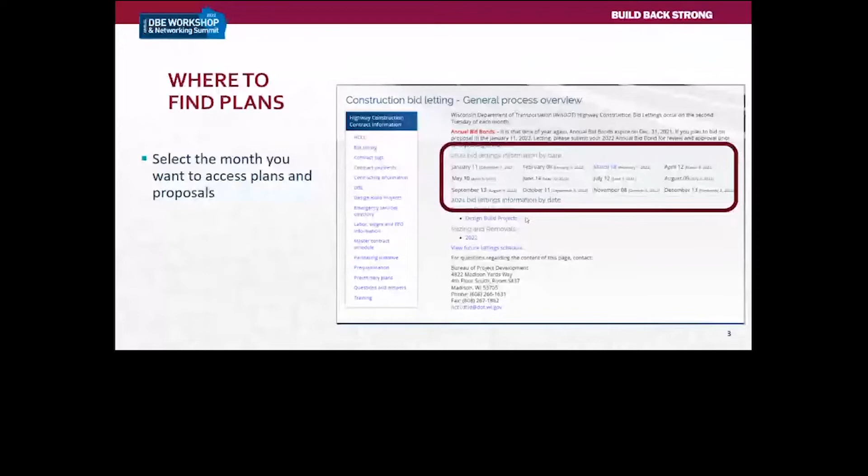2022 year general process overview, and it'll give you the letting schedule by date. As you can see, we have January through December listed here. We're in the third month, which is March, so you can see January, February, and March, but we have to wait till we get into the let month to see the plans. So when you click on March 8th, which is the bid letting that's coming up next week, you can access the plans and the proposal for any one of the proposal numbers, or call numbers. It starts at 1, and I think there's possibly 44, 45 on this letting for March. So you simply click on the plan and the proposal, and then save it to your desktop or your C drive, whatever you have for storing those materials.

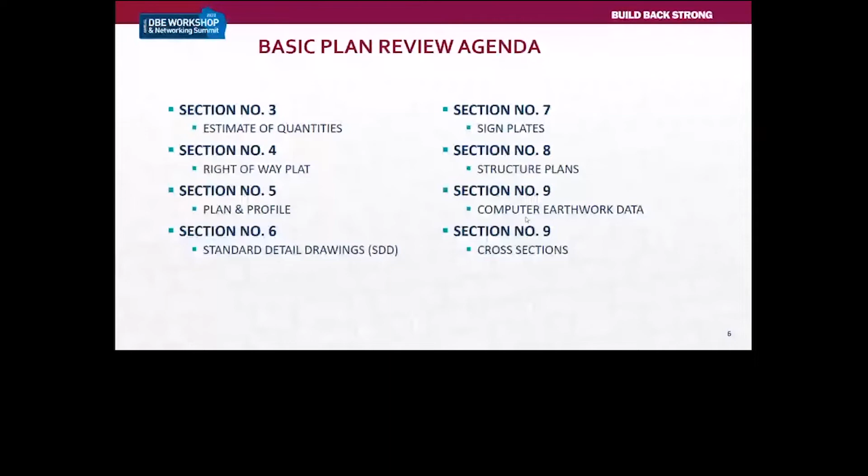Section 5 is your plan and profile. Section 6 is standard detailed drawings, or your SDDs. Section 7 is sign plates. Section 8 is structure plans. Section 9 is computer earthwork data, as well as cross sections. Now, we chose this particular plan to review to give you an idea, because this one has it all, 1 through 9. In some cases, you will only have a couple of sections that are pertinent to your specific project.

Other stuff that we're going to review and touch on today is other contract documents. We're going to briefly talk about the special provisions, the standard specifications, addendums, and the hierarchy of contract documents. And with that, I'm going to turn it over to Don.

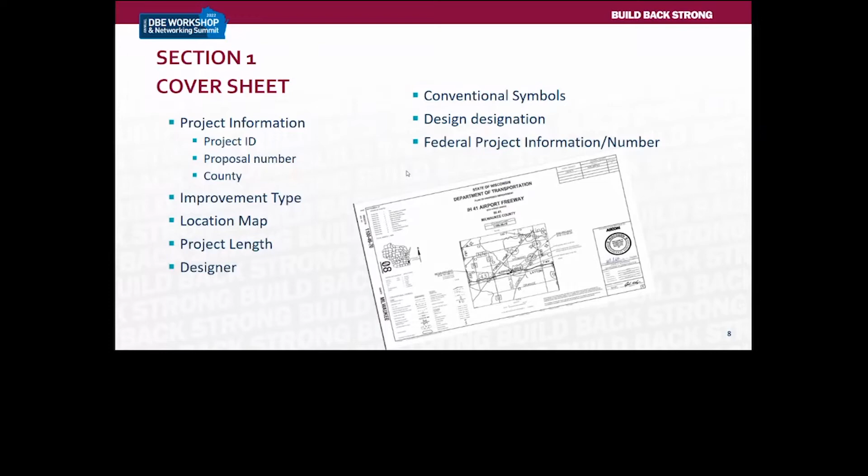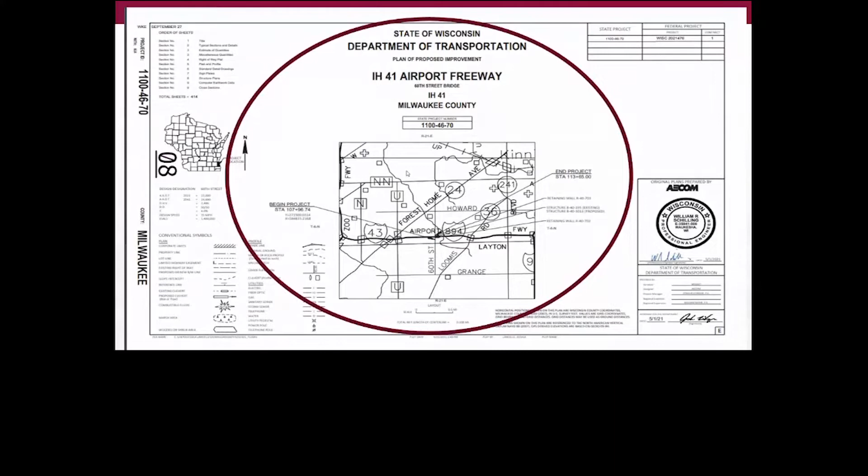Okay, here you can see the cover sheet of the project that we're going to walk through today. It's the Interstate Highway 41 Airport Freeway project. As Benji said, I think it has all the different types of sheets that are available in the log of sheets. So we'll be able to walk through this particular plan and show you all the different types of sheets within it. 1100-46-70, as you can see, is the project ID on here. And as I mentioned in the last slide, all those different things are on there.

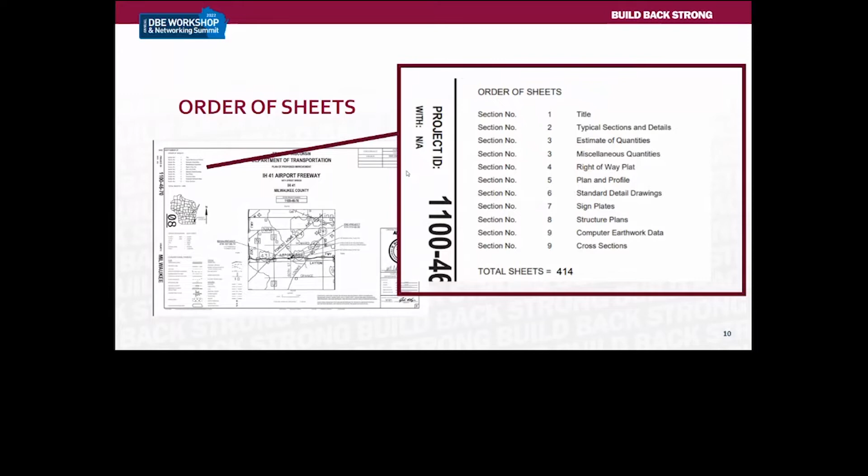So the next thing you'll notice on the upper left-hand corner of that cover sheet is the order of sheets. Very important. You can go to that right away. You don't have to open up and try to leaf through the plan. You can go there and see where the different parts are. That'll give you at least initially what part of the plan you're looking for. As an example, if you're looking for cross sections, you're going to go all the way to the end, section 9 at the very bottom there. So next slide.

So the general notes portion is probably one of the most important parts of section 2. That's where you're going to have a lot of information relating to generally what is required on that particular plan. It's very critical to review this before you're bidding and during the project, so you understand that you covered everything in your bid, and also during the project you cover everything that's required, because if you haven't, you could find yourself in a bit of trouble, either not bidding enough or not being complete as far as the engineers indicate when you're done with that particular item.

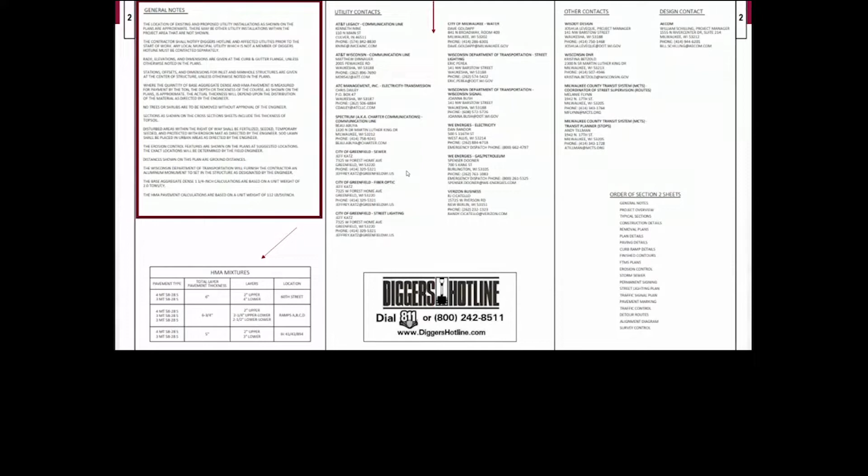You'll also see some other charts here. HMA mixtures is shown here. In the middle, you've got utility contacts. Very important that you understand where that is. Digger's hotline down below. Then you've got other contacts, including the design contact for the plan.

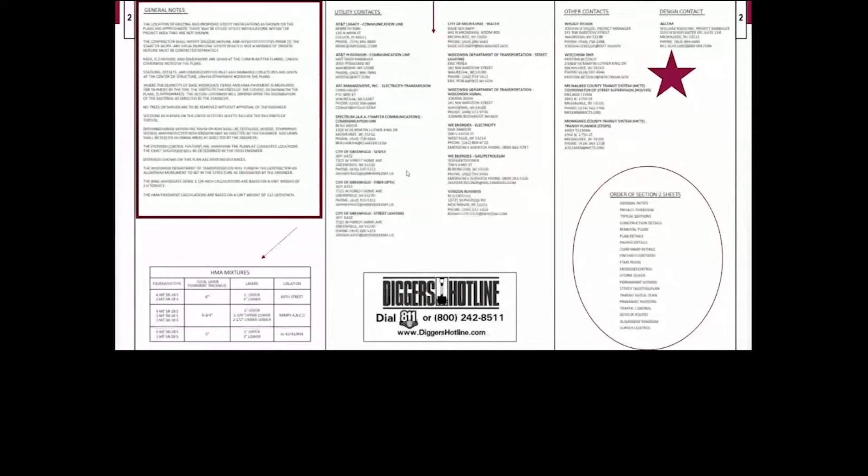And then there's a repeat of the order of section 2 sheets right there. So again, if you're looking for a certain sheet, it's very easy to look at that and say, well, it's about halfway through. So you don't have to go through all the different sheets in order to find what you're looking for.

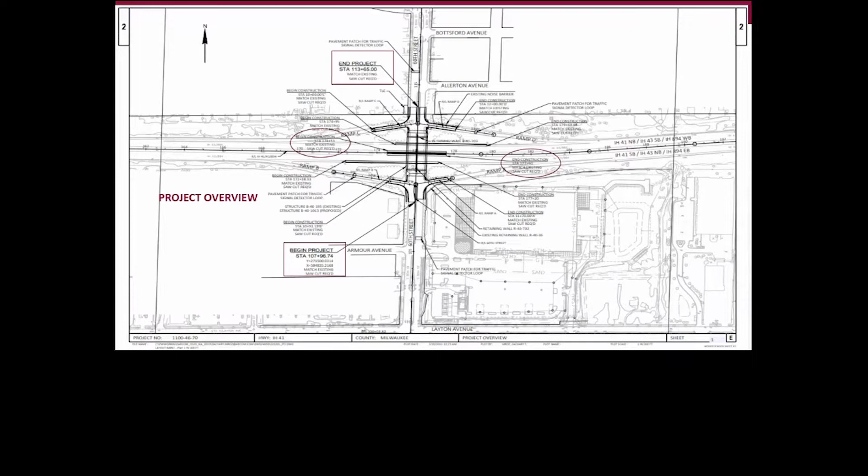Hey, Don, this is Steph. There's one question in the chat. If I'm focusing on clearing and grubbing, what section am I looking for? If you want to put some emphasis as you explain the plan on that, please. Okay, that's a good question. Typically, there may be a detail on the plan that shows that, and as we go through, we'll watch for that and point that out as we look at some of the sheets in the plan.

Also, when Benji's going to talk a little bit about miscellaneous quantities, it will tell you clearing and grubbing quantities, and also will show you the stationing and offsets for those items. That will then give you the information you need to go back to the plan sheets to see where those actually are. So we'll try to remember that and show you where you can find the clearing and grubbing. Good question, Marcus. Thank you.

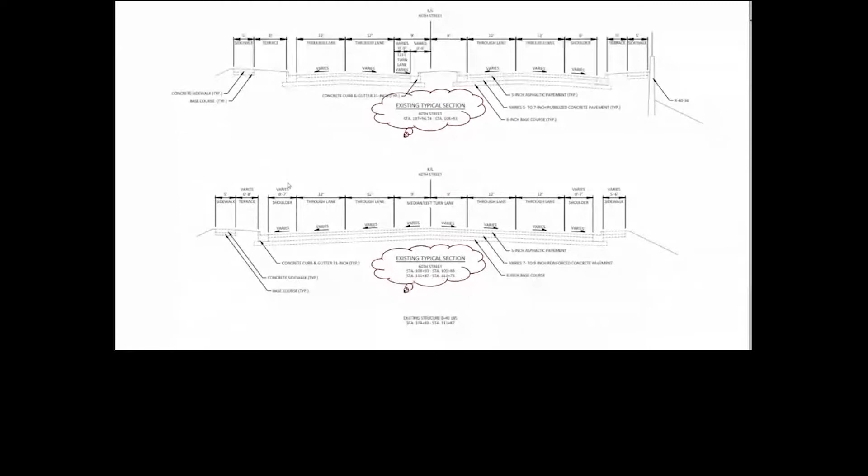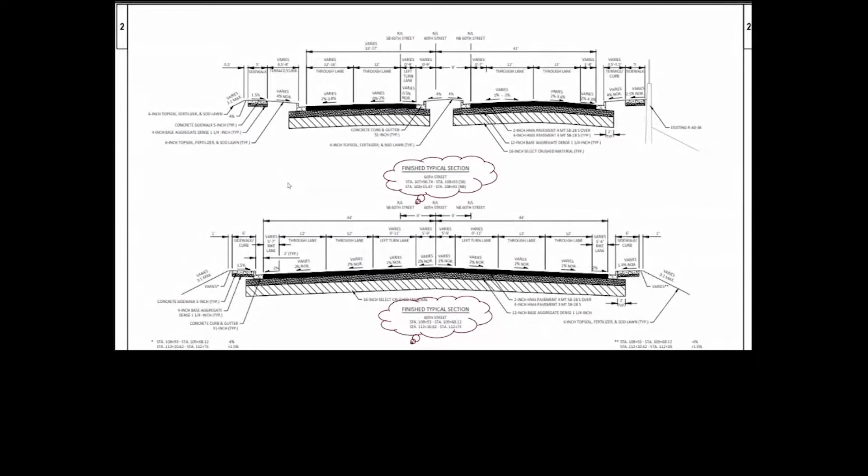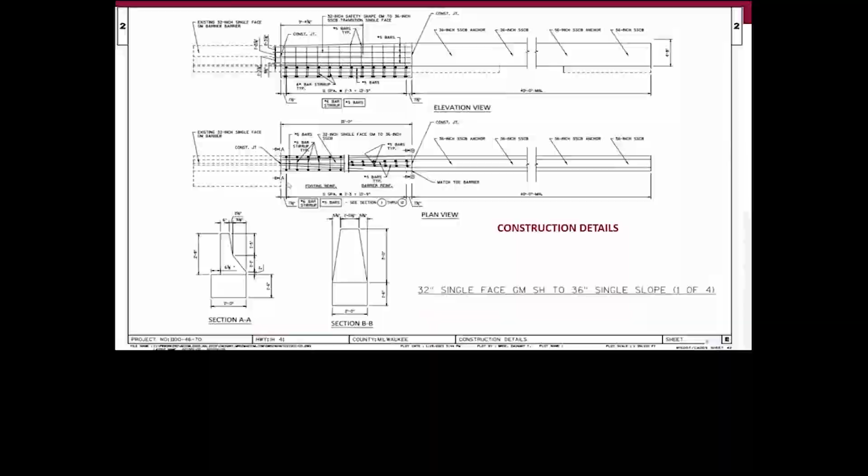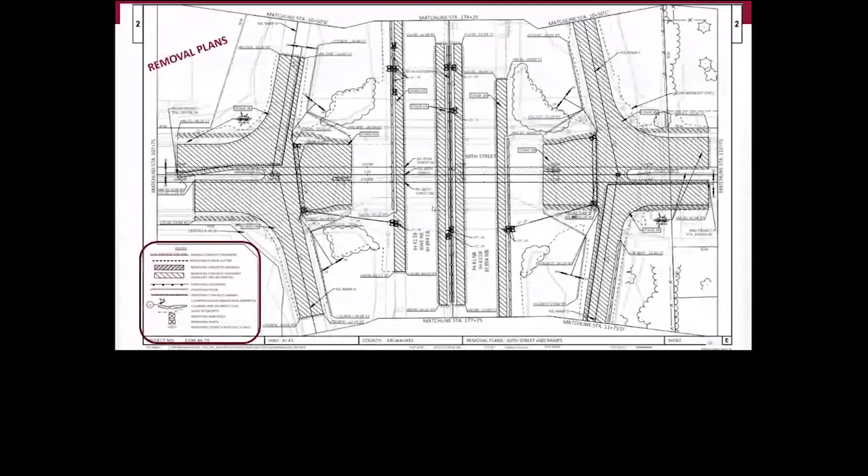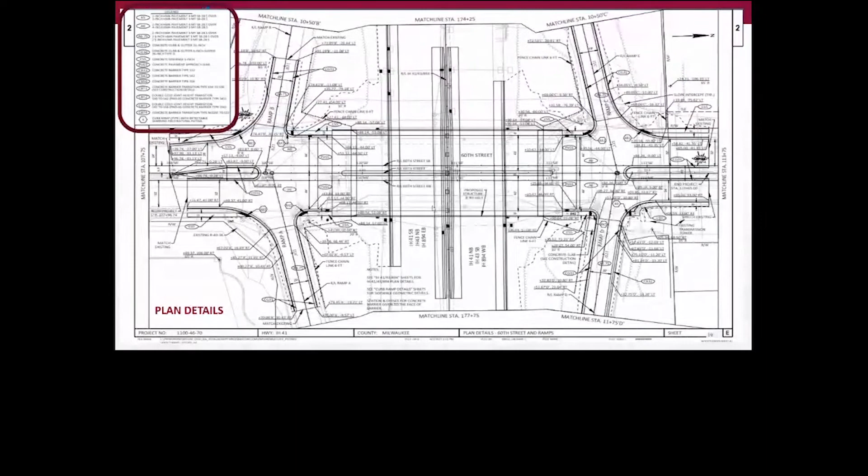Okay, this is a plan detail, which gives you kind of a look from above down onto the project and the improvement you're going to be working on. In the upper left, there's a legend, which has a lot of different item numbers and things in the circle there that pertain to items on the particular plan sheet here. Again, this is looking down, showing you limits of pavements, bridge limits, those types of things. A lot of this information is used for laying out the project when the survey lays it out, as well as you building it to understand what items go into that particular improvement.

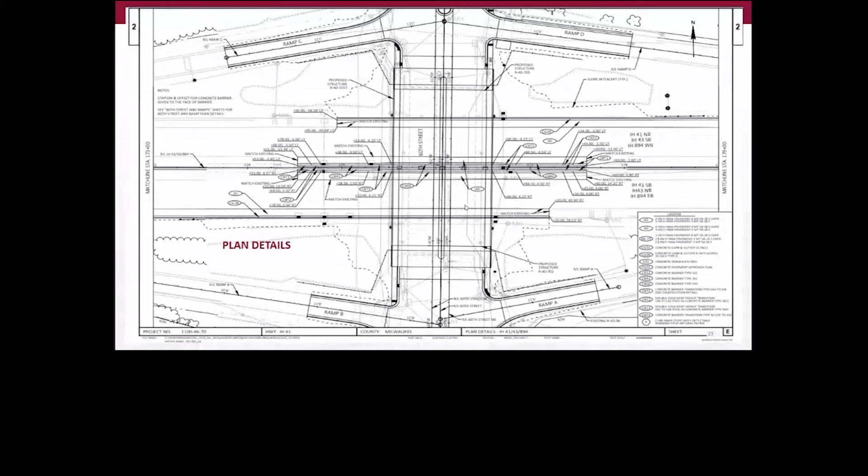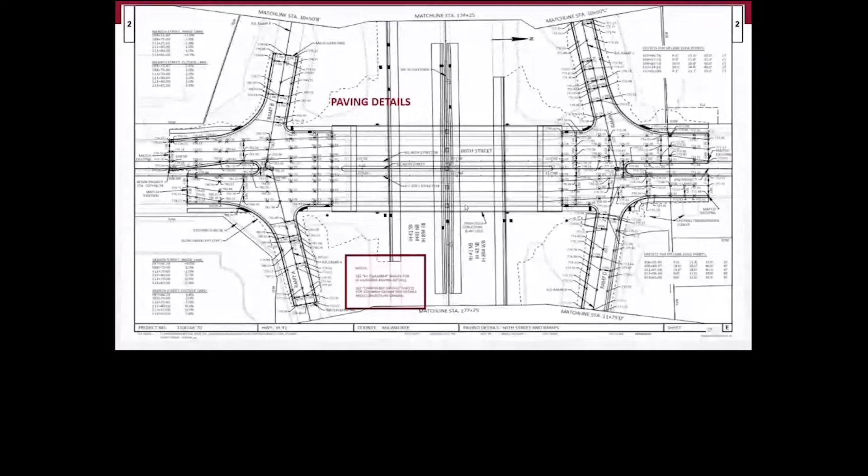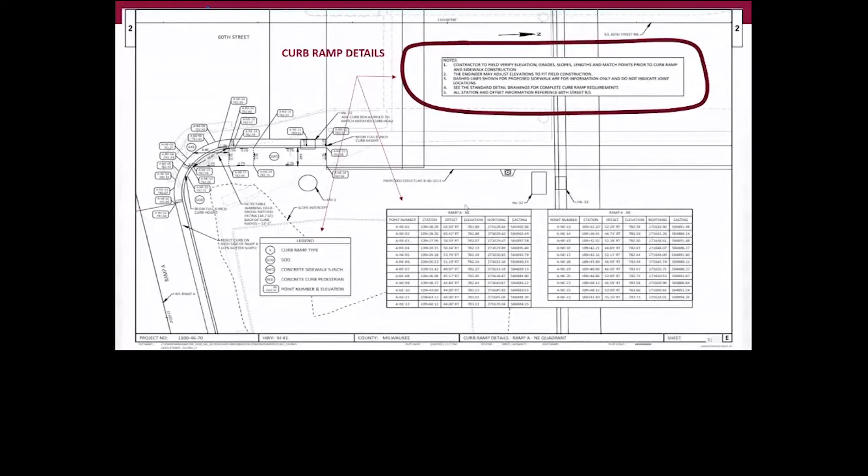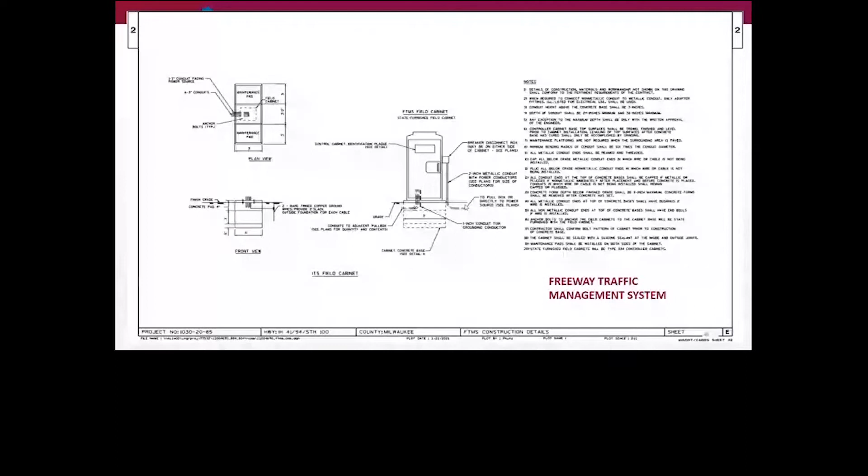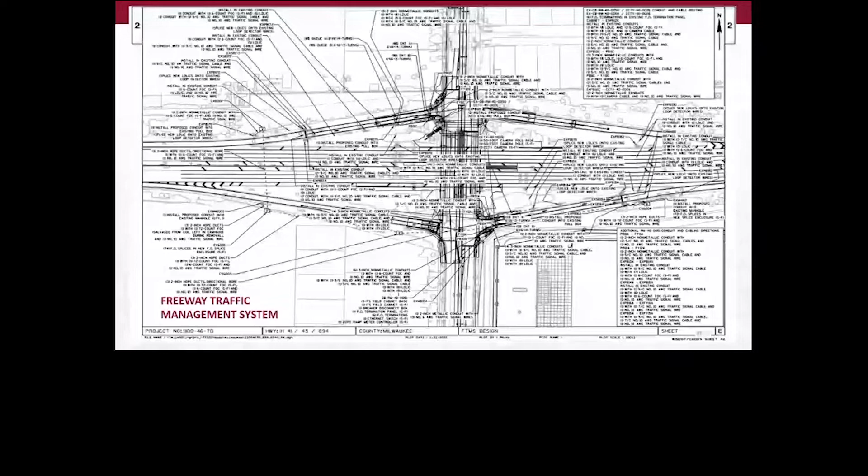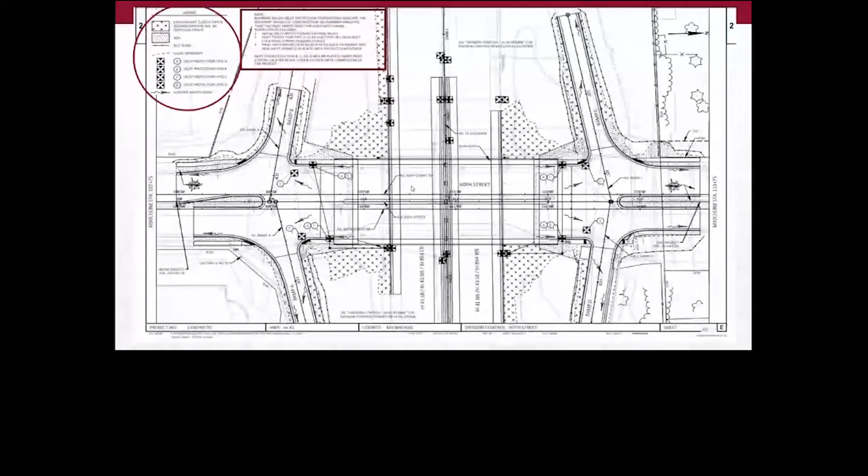So this is the kind of sheet that if you're an erosion control subcontractor, you'd be looking at to try to understand where things are being placed in relation to different things on the project. A lot of these will be repeated in the actual quantities and the miscellaneous quantity sheet, but these are the actual sheets that show you how to put them in, the notes relating to that, and all the different items on the erosion control plan.

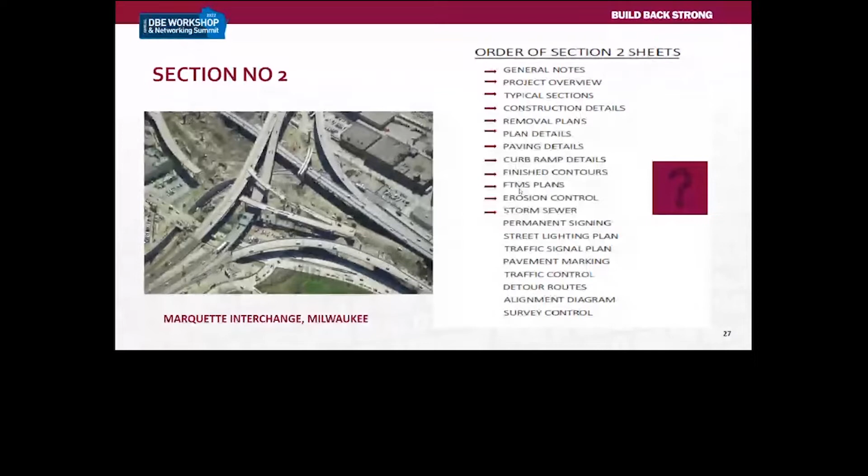So I am going to move on to a couple more sections in section number 2, and we're going to start out with permanent signing. These are pretty typical plans as far as the types of signs, the required signs that go on freeways. They're pretty uniform, and it's not up for interpretation. Basically, you're told exactly what's supposed to go there. So you have a series of permanent signing plans, and you're looking at it.

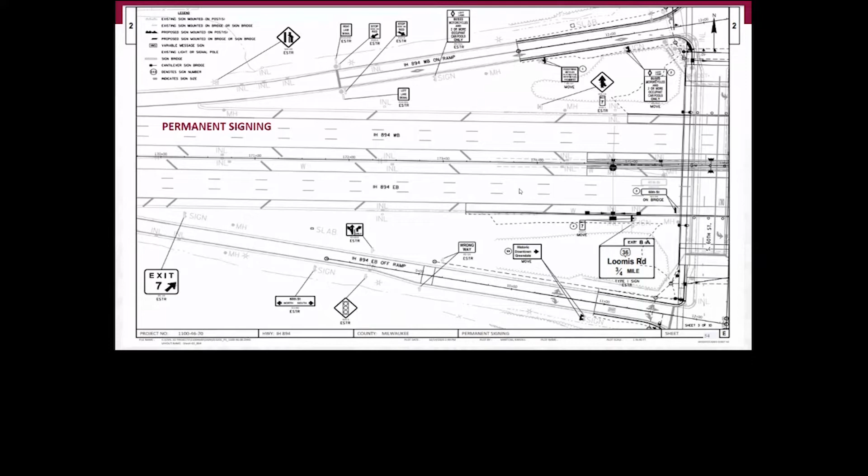So you always want to make sure, especially if there's staging, that you are working with the other contractors to make sure you don't put your permanent signing in and they still have earthwork to do or something along those lines. You have to learn how to coordinate certain aspects of the project.

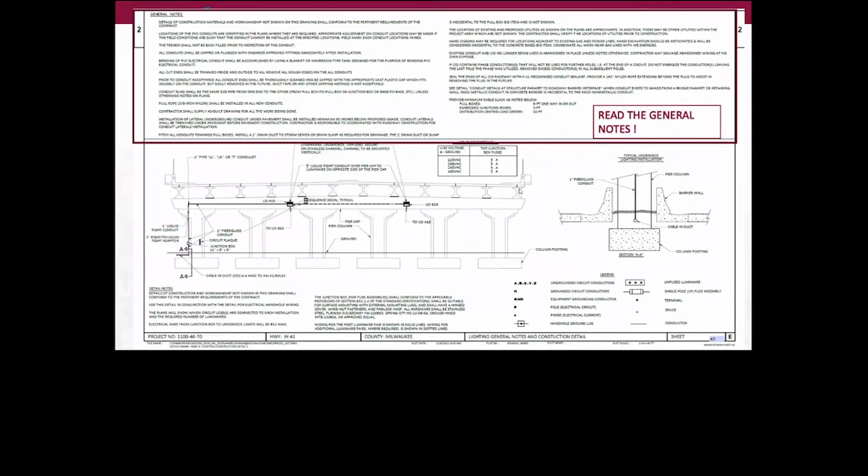So make sure you read the notes anywhere on the page. Super important, because that's where people get hung up when there's an issue. They just didn't read it or read it correctly.

So, Benji, we have a question that's come up on station numbers, asking if the station numbers are organized in a standard way. For example, do all odd numbers run north-south or east? Start on the south side of the project limits and sequentially increase as it moves north. Does that make sense? Yeah, I'll start this out. Don, you can jump in. Excuse me. Okay, yeah, I can jump into this one.

Typically, stationing runs from south to north. So if you're looking at a plan where the roadway runs from south to north, you'll probably see stationing more like a 1 and maybe goes to a 10, 1+00 goes to 10+00 as you're moving to the north. And when you're going east to west, it typically would start from a lower number on the left side or the west side and then go towards the east. Now, that isn't always the case, but that's typically what is done.

Because a lot of times you may have configurations with interchanges and ramps and all kinds of things that go all different directions. So the stationing may not always follow what I just said there, but in general, they basically do what I talk about. They typically run south to north and west to east, but not always. So you'll have to be careful.

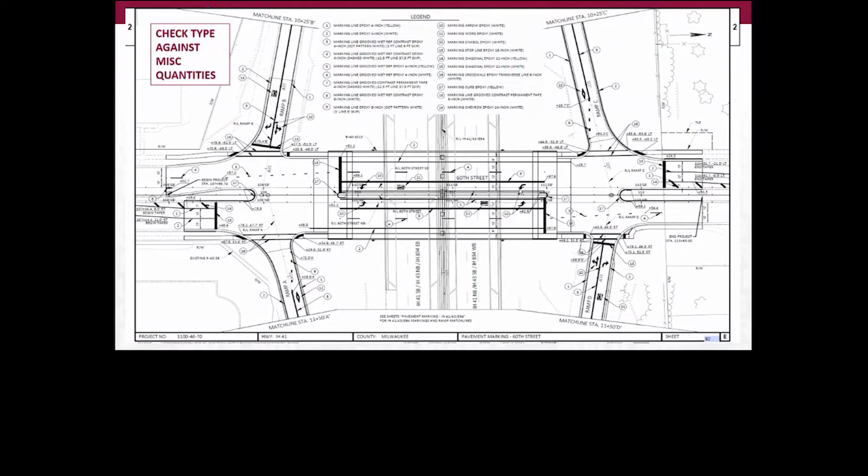So there's times when things get changed that don't necessarily make it into the final plan, depending on what the time frame is. So always check those. That's just good practice to check what you see against the miscellaneous quantities.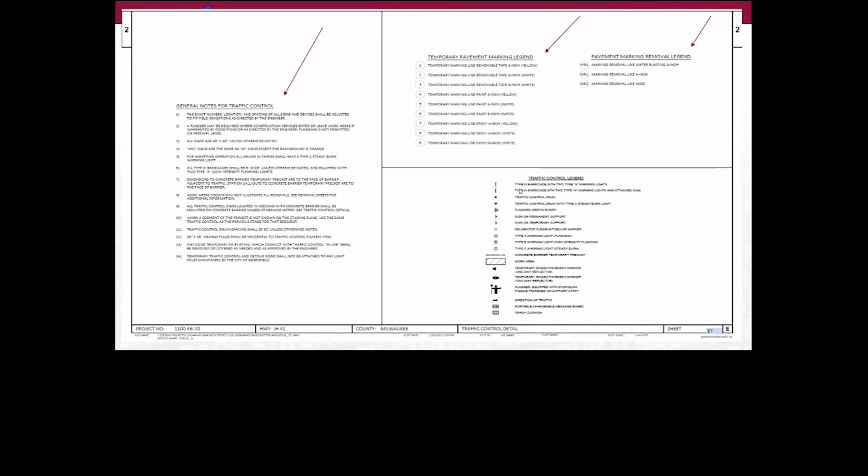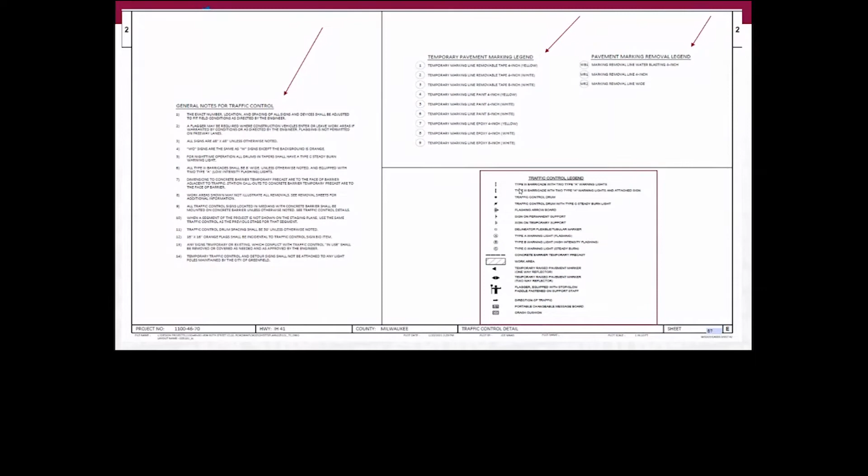Same thing with temporary pavement marking legends. Tells you what you're supposed to do, where you're supposed to put it, and sizing, color, the whole bit. Same with the pavement marking removal legend. Gives you the little bubbles and tells you where you're supposed to remove these lines. And again, these are things you want to compare to the miscellaneous quantities. And of course, we have our traffic control legend, which gives you all the different symbols that you'll see on the plans themselves.

As an example, this is a traffic control detail for a 3-lane full freeway closure. It gives you where the signage goes, gives you the traffic control notes, and again, read the notes. And it gives you the basic layout in conjunction with the MUTCD.

This is the layout. It's not in stone. There are certain things that might tweak this just a little bit. Before you do any tweaking, though, you have to have it discussed. But this is your best basic typical layout for a 3 full-lane freeway closure.

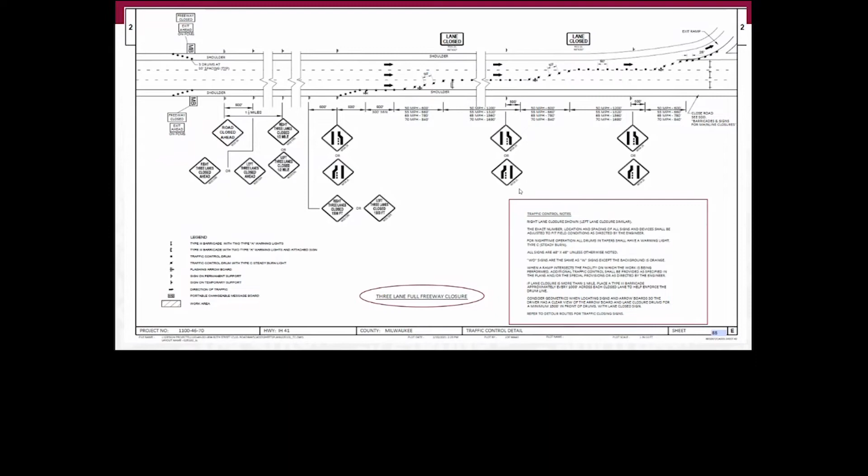I showed this because a lot of the projects have detours. I mean, how many times have we gone down the road and we see the detour signs? It's amazing. You might see, depending on where you are on the road, a couple of banks of signs. But a detour route, especially for a project like this, has got so many signs. So while you're doing this, you have to read the notes about covering it up.

How is it getting paid? Is it incorporated into the detour route bid item? Is it paid separately? There's all these different things. So you have to make sure that you're reading all the notes and you understand how the items are paid.

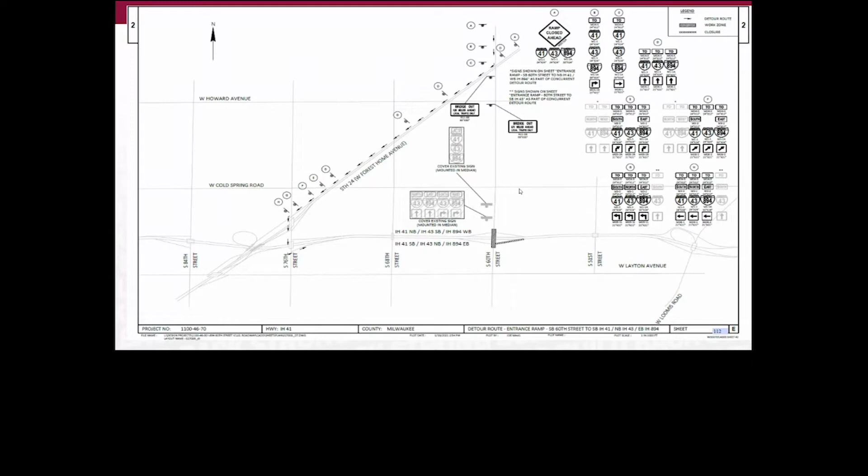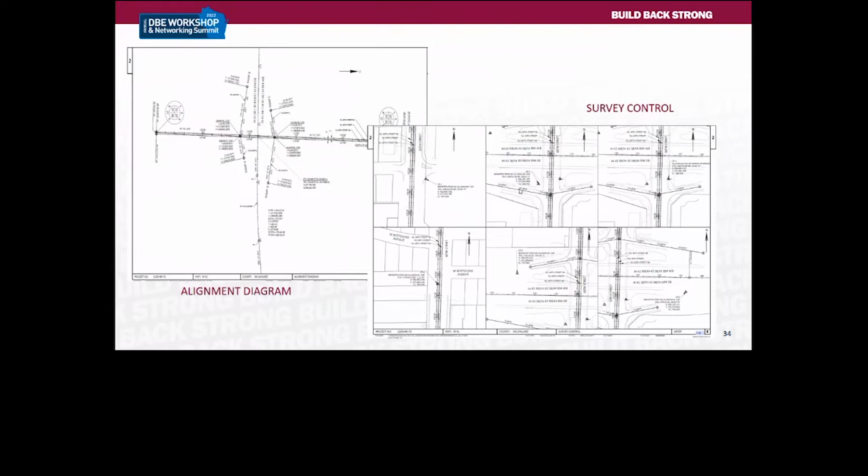The other thing we have is the alignment diagram, as well as the survey control. The designer gave you all these different benchmarks and control points in this. So when you're doing your GPS for survey, you know, when you're benching to do your survey layout and everything else, they provided that for you. And there's also a section in the special provisions on this particular job that does talk about that.

So section 3, estimated quantities and miscellaneous quantities.

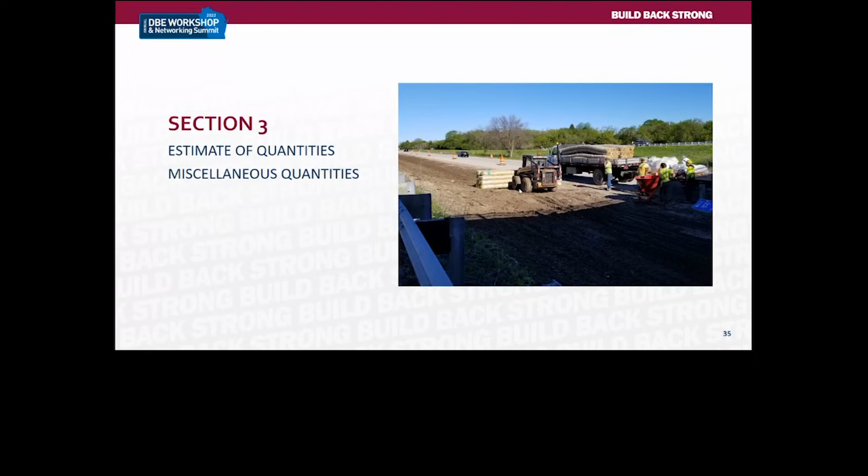Some people might say, well, isn't that the same thing? Well, actually, no, it's not. The estimate of quantities is a sheet at the beginning, right before the actual breakout and breakdown of the miscellaneous quantities. It'll give you the prop line, which is the sequential ascending order. It starts at 002 and there's no finite number of items you can have on a project, but it does increase by 2.

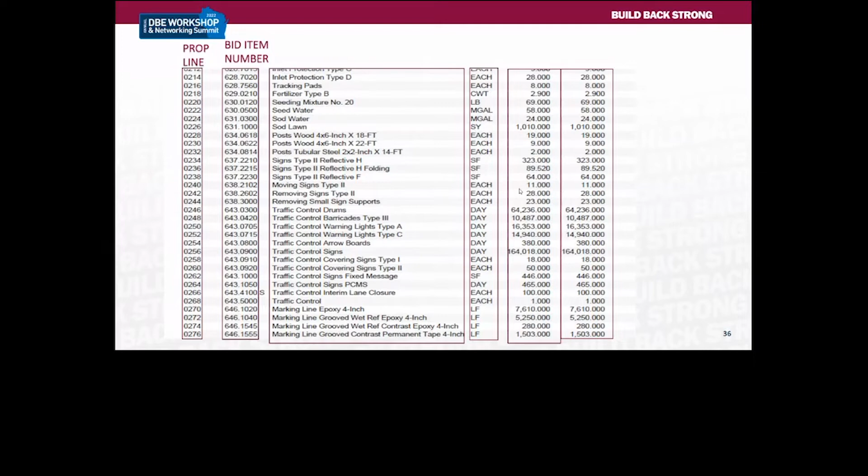Then you have the actual bid item itself. You have a description of what that bid item is. It tells you what unit of payment it comes under, whether it's each, cubic weight, a pound, square foot, day, linear foot, square yard, cubic yard. It'll tell you right here. This is your total that they show for this particular project, and this is your quantity.

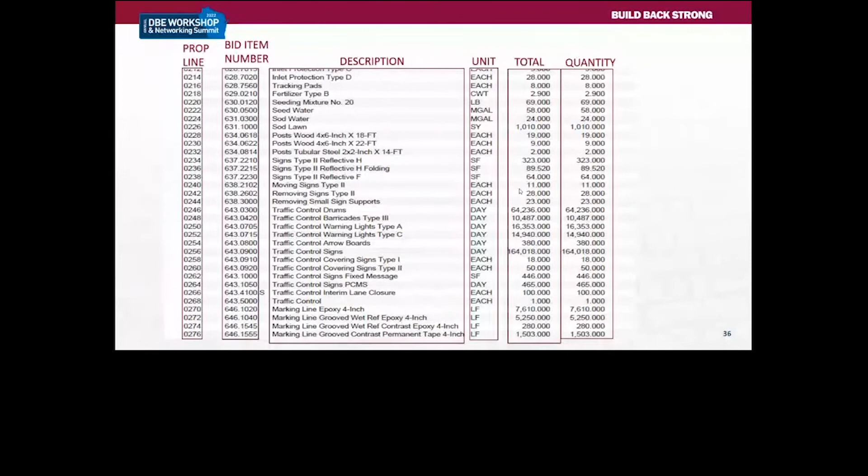Now they have a total and a quantity because sometimes a project will have 2 different project IDs, but the quantities under the bid item will cover the 2 project IDs. So they'll have one estimated quantities for one project ID, then another one for the other project ID, but they will have a total quantity if they have like bid item numbers. It's a little confusing. This one thankfully only had one project ID, but if you do get into projects with multiple project IDs, make sure you're looking at all the sheets and you know what the actual final quantity is for that bid item.

You'll also find right after the estimate of quantities is the Earthwork Summary. If you're doing earthwork, learn how to read these, make sure you understand. The designer will typically always give you an undistributed amount. It talks mostly about the excavation under bid item 205.0100, but it also gives you the 208.1100 select borrow expanded EBS backfill. So these are your common excavation totals that they're anticipating.

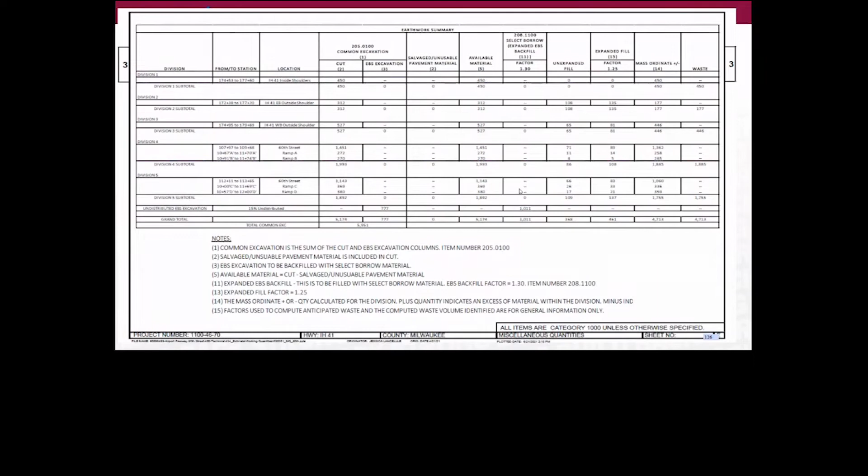Make sure you're reading the notes below because it gives you all sorts of information as far as the sum of cuts and fills. It gives you what your available material is for salvage versus unsuitable material. So these are things you absolutely want to look at if you're going to be participating on these types of bid items.

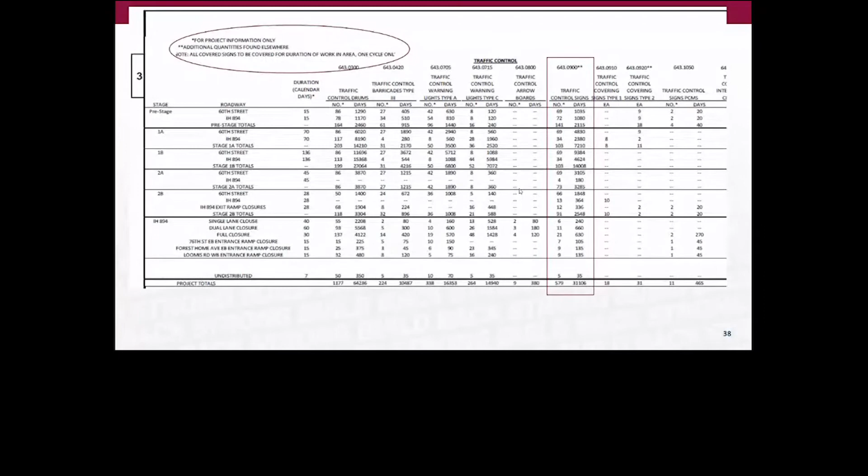Okay, I pulled out the next couple of sheets because a lot of people get trapped and caught up on this. This particular sheet gives you the notes that say one asterisk is for project information only. 2 asterisks is additional quantities found elsewhere. And then it's also telling you that all covered signs to be covered for the duration of the work in area count as 1 cycle only.

So if you cover it up, it only counts as 1 until you take it down. And it's telling you it's supposed to be covered for the duration of the work in the area. So those are not paid by days. Those are paid by 1. It gets put up, stays for however long, gets taken down. That's 1 cycle.

So I want to draw your attention to traffic control signs because you see we have a double asterisk there. And we have a total quantity of 31,106 signs. But I know because it has a double asterisk that there's some quantities elsewhere, so I have to go find those. The easiest way I do it is I search the plan. I just put in Control F, put in the item number that I'm looking for, and then just keep hitting next. So that's what I did when I was putting this together, and it brings me right to it.

So again, it has additional quantities found elsewhere. Well, we already know where 1 is. We know that our quantity is about 164,000 something. And here we have 132,912. And I did do the math. It does match. So we know that this particular item is showing quantities in 2 different locations. So you always want to make sure that you're finding all the quantities and that they're adding up to what the schedule is saying.

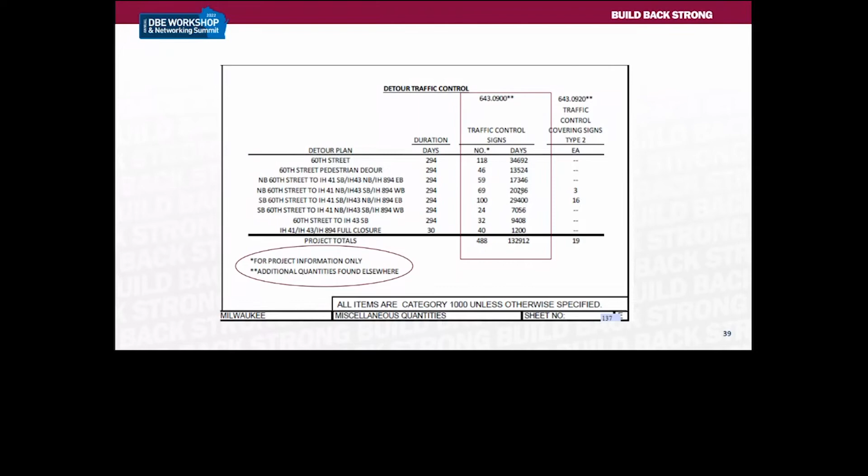All right, we're going to move on to section 4, the Plat. This gives a lot of good information about the monuments. It gives a lot of good detail in the notes as far as right-of-way boundaries. It also gives information on relocation orders for utilities. I could spend about an hour, hour and a half just going over this sheet with you guys, but I will spare you. But remember that this is in here, and just don't flip past it. Don't think, oh, I don't have to read that. Take the time, read it. You'll get some good information from it.

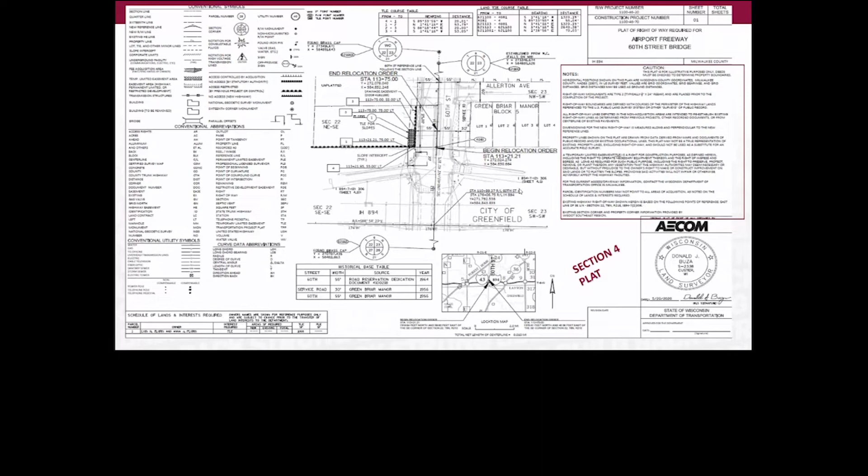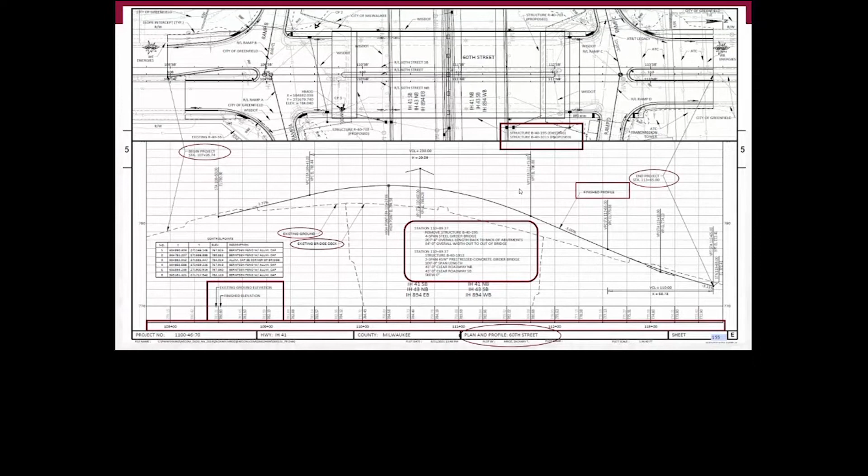So our plan and profile. You see at the top, we have the plan view. You pretend like you're looking down at it, and it gives you an idea. And Don explained this earlier on. So on this particular one, you can see the top is the plan, the bottom is profile. We have a begin project, and we also have an end project on either side of the page. You'll note that we do have a dotted line and a solid line.

The notes are telling you that the dotted line is an existing ground. That's your existing ground right now. It's also telling you right where your existing bridge deck is. So this project is elevating the roadway and the bridge deck, and that is shown as the finished profile, and that's your solid line. There's a lot of good notes on this page.

Down at the bottom lower left, you'll see that you have a shaded gray number, and then you have a darker gray or almost black. That is your elevation. Your light grays are typically, if not always, your existing elevations, and your darker is your finished elevation. The plan and profile isn't totally loaded down with notes and information. The notes and information that are on here are direct and concise and tell you exactly what you need to know based on this particular page.

So here it's telling us that we have an existing structure and we have a new structure, and it's telling you where it goes. It's talking about how you're going to remove the structure and then put a different one in its place, taking a 4-span steel girder bridge and making it a 2-span 45-foot wide pre-stressed concrete girder bridge. So these are all different things, and that'll also help you if you are part of a demo team. At least now you know that you're taking down a steel bridge where you might not have known that had you not read any of the other pages.

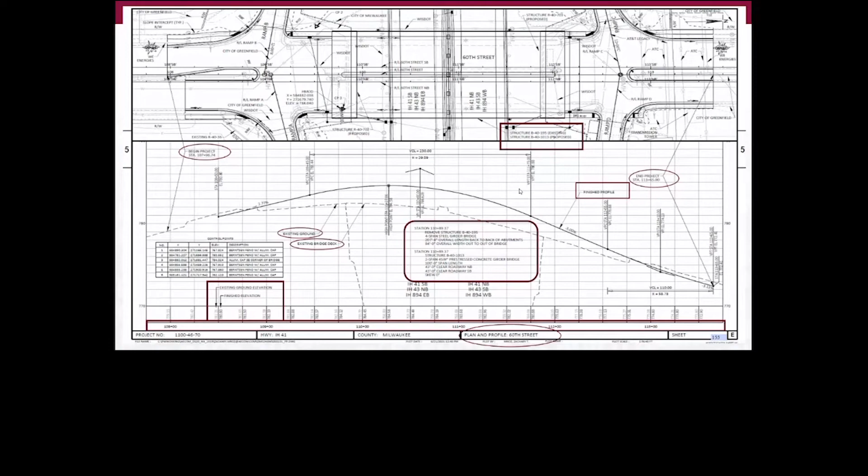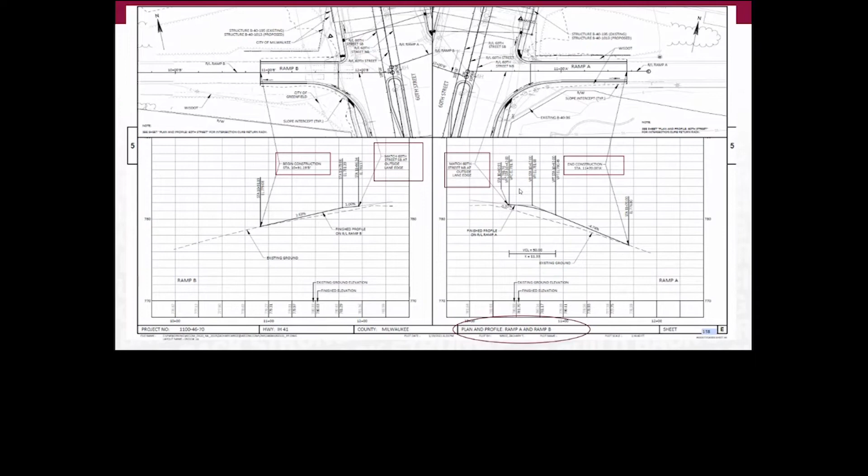Also, they provide plan and profile for ramps and roadways, anything that's within the project footprint. So again, it's the same top view or the plan view, and then you have your profile view, and this is particular to ramp A and B for this project. The same information is also going to be on the sheet as far as elevation, existing and finished profiles, and your start and stop positions.

So what the designer does is, as they design, they have a whole bunch of items that are standard that they then say, what standard details do I need for those items that are put in my particular plan? And so this particular designer has chosen these as being standard details that are not changed, but they're the standard ones that are going to go into this particular plan. These are different than the details we saw in section 2, where they are specific details drawn separately and are different than the standard details.

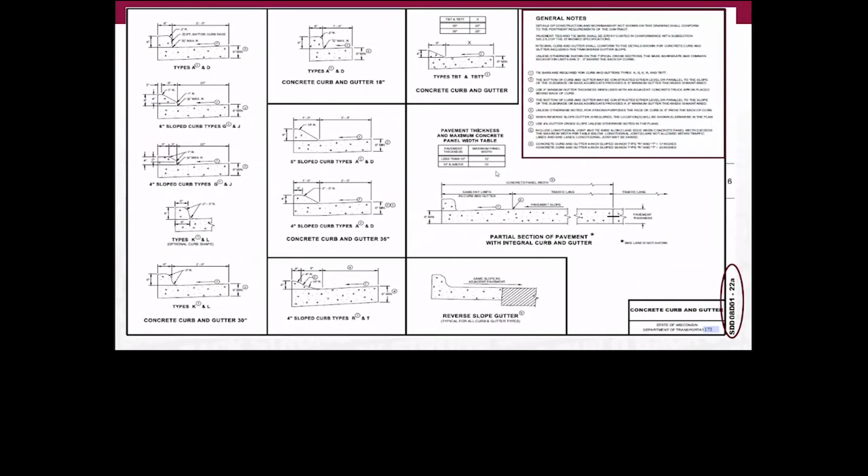Then it will have the dimensional characteristics of whatever item it is, including, in this particular case, rebar, if rebar is placed. The dimensions of the concrete, in this particular case for curb and gutter, the slopes, so on and so forth. So the different types of curb and gutter, you may have on the plan, it may call for a type K curb and gutter or a reverse slope curb and gutter. All of these are shown within the standard detail drawing for concrete curb and gutter.

This one shows a concrete base, which is an electrical base type 10. So you can see, again, there's a section on the upper left with general notes. And all these are very important that you understand, because that's how you will have to construct these items on the project. You can see the details there that show the rebar, the boltings, the concrete dimensions for the base, so on and so forth.

Again, a standard detail drawing with the number on the bottom right there, standard detail number. It's hard to read there, but 9C11-10, I believe is what it says. This again would be put in a plan by the designer if they need concrete base type 10 on the project.

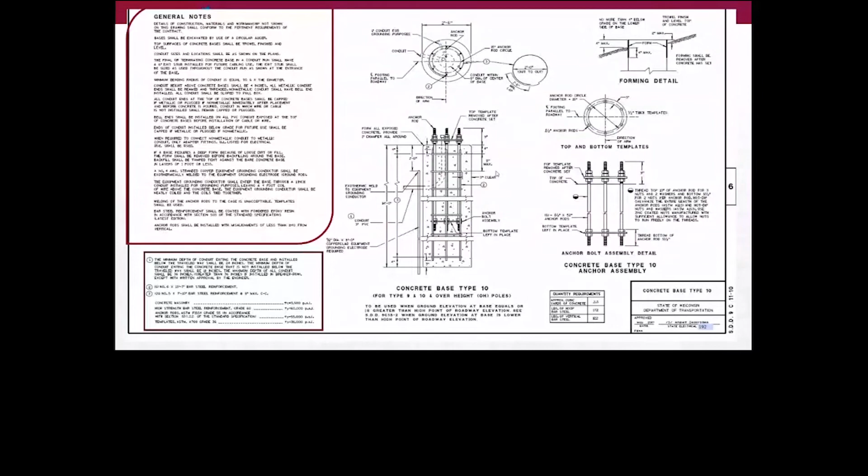Next, we've got section 7, which is sign plates. Before, Benji had shown kind of a plan view, a layout of all the different sign plates. But what it didn't show there was how these signs are constructed, what the dimensions for the lettering are, what the dimensions for the sign itself are, what colors to use. All of those things are indicated here on the sign plate

standard details. So these are not standard details. These are sign plates that are actually for this particular project. So these sign plate sheets show what they need to design, what they need to build as far as the suppliers for the signs for this particular project.

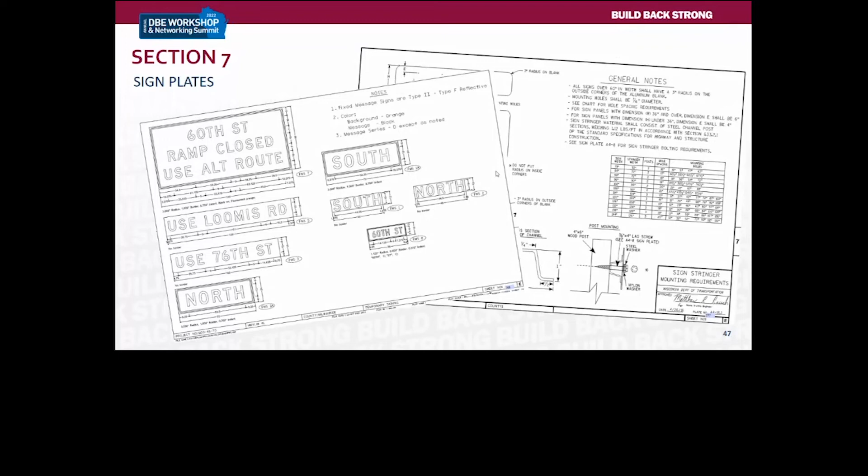All right, the next section is section 8, which is the structures, and it's kind of weird because typically a structures is almost like a plan within a plan. Typically a structure plan is designed by a different area, the structure unit, either in central office with DOT, or maybe a sub-consultant does this, or a sub part of a company does this. But it's kind of a structure plan within the overall plan.

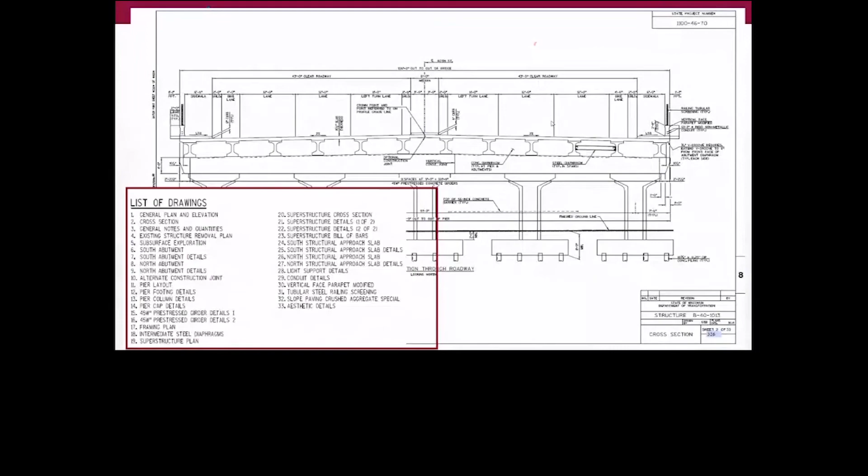So this would be the list of drawings, page number 2 within the plan. You can see down at the bottom right, there's a sheet number 2 of 33, and that refers to the structure plan itself. So that's an independent numbering system for the structure plan, independent of the overall plan sheet numbers. But again, this is in section 8, I believe, the structures. So this shows the cross section of the bridge itself, some of the substructure units and the beams, so on and so forth, the dimensions.

This particular plan within the structure plan is the general notes and quantities. It's a very important sheet because it gives you the total estimated quantities up there in the upper left. It gives you also where those quantities are located. Some quantities are located in the south approach, north approach, the abutments, north abutment. So this is the breakdown of quantities for the bridge items. It gives the constructor an idea of where all the items are.

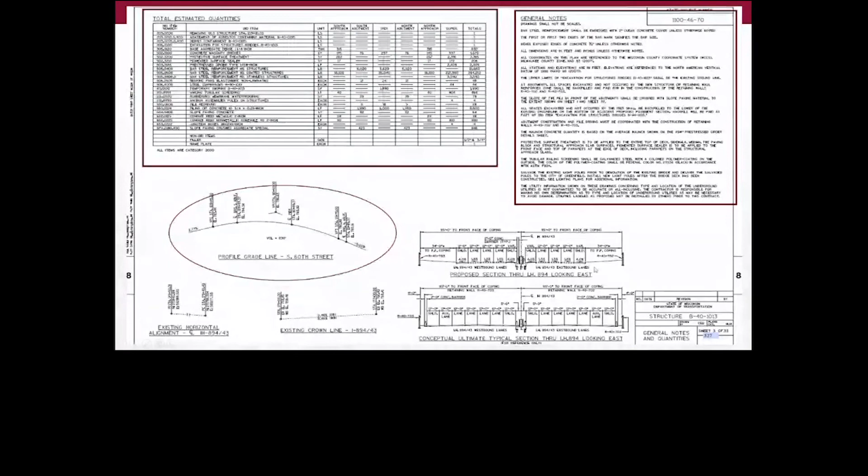Then also there's a very important part in the general notes, which pertains to the structures. Down lower right, it gives you a cross-sectional view of the proposed section, and a couple different cross sections there relating to the bridge. In the circled area, it gives the profile, the actual vertical profile of this grade line for the

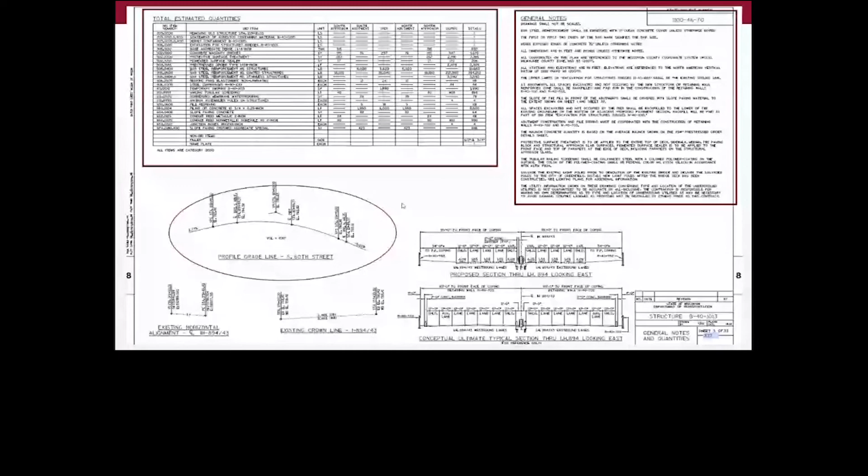Don, we have a question regarding the standard detail drawings manual and how often it is revised. And when revisions occur, are revisions published in a summary? An example: last year on a project, the plan had an old standard detail drawing, but by the time they installed some guardrail, the standard detail drawing was changed since the plan was drafted. Consequently, they had to go out and redo the work.

Okay, my understanding is there's periodic revisions of the standard detail drawings, and it might not be all at one time. The standard detail drawings are kind of designed by different areas. For example, if it's a structure related item, the structures group probably would be doing the revisions. But you'll see on each one of the standard detail drawings, they have dates of revision on them.

So when we get to the end of the presentation, Benji's going to go over kind of the hierarchy of what governs. Now, in Marianne's particular case here, I'm not exactly sure if someplace other than on the plans itself, they had changed the requirement for this standard detail drawing. I'm not sure, but certainly if it was in the plan and it was not changed anywhere else within the contract documents, and Benji will talk about all the pieces of the contract documents, that would be something that would be of a concern, certainly to a contractor. How can they be advised that they weren't supposed to install it per the standard?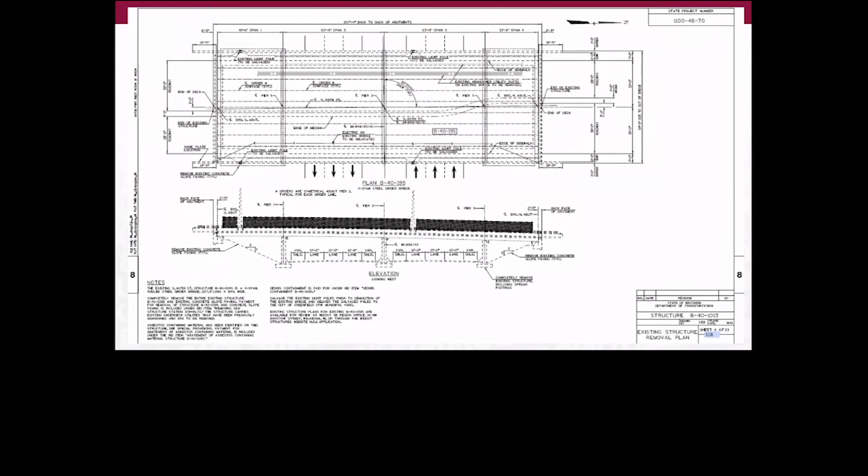Sounds like some good advice, Benji. We do have about the presentation. Okay, so Don, you're going to have to go through this a little bit. Okay. Go through this one.

Okay, this is just another detail within the bridge plan, pier cap details, which shows the bill of bars, which is important because that talks about the reinforcing steel that's required that the contractor needs to order.

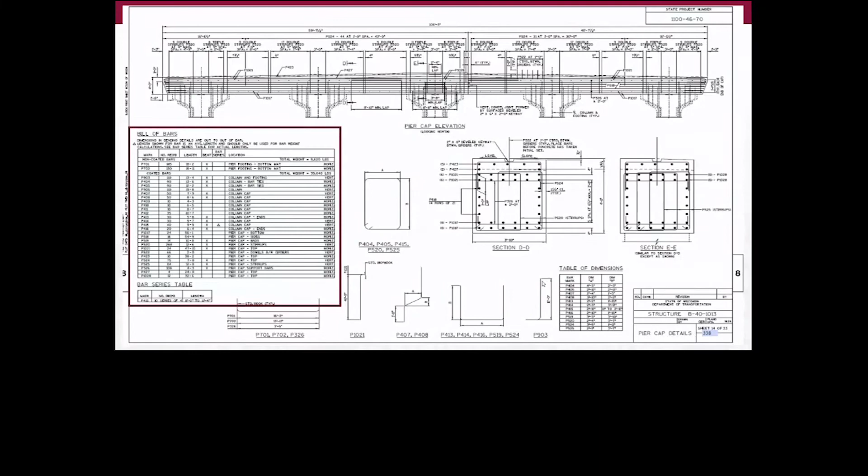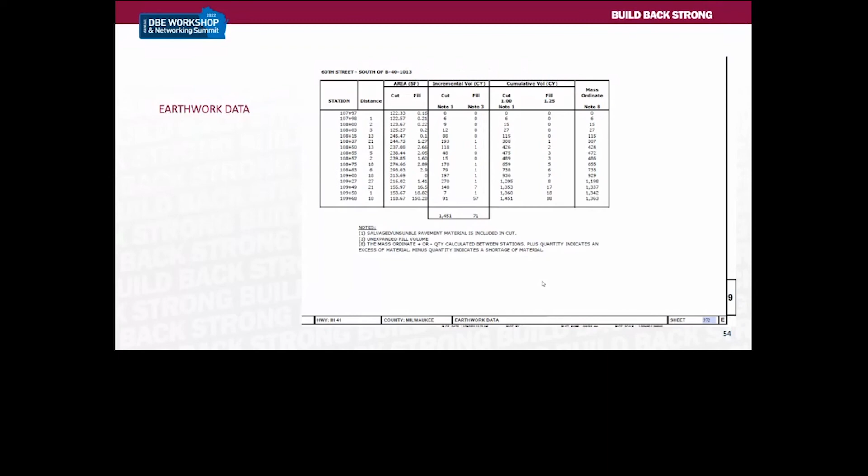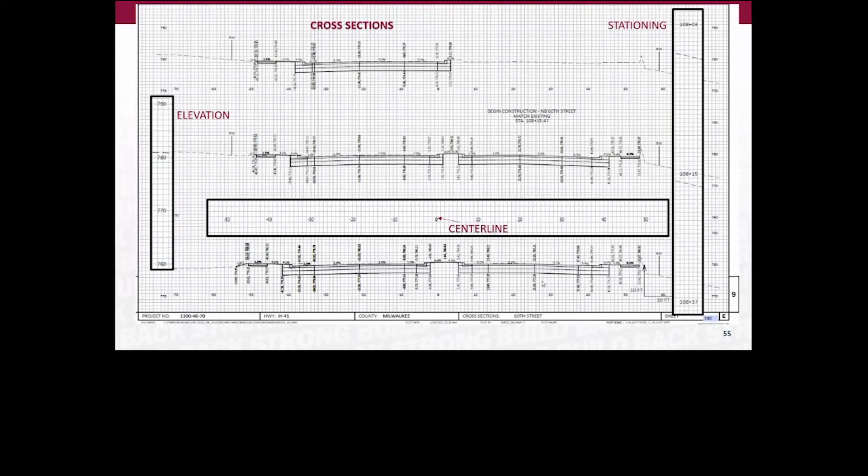Earthwork data, we talked about it before. It comes after the estimate of quantities and will also show up in the cross-section portion of the plan, which is under section 9. As we move into cross sections, on the left-hand side, that's your elevation. In the middle, the 0 is your center line. As you move left, that's negative. As you move right of the center line, that is positive. And then over here, you have your stationing. That's how you read it. It's kind of small, and sometimes it gets so cluttered with information, you've got to take your iPad and blow it up just so you can read a number.

So what I want to do here is talk real quickly about something. At the center line, 0.00, our elevation is 781.99. We move 5 feet over. The top of subgrade, where we're going to start putting our base course down, whatever it's called out here, is 778.56. Our finished grade elevation is 781.78. So just so you understand how to read these, you've got your top of subgrade or your blue top, and then you've got your actual finished grade for the whole entire structure of the roadway.

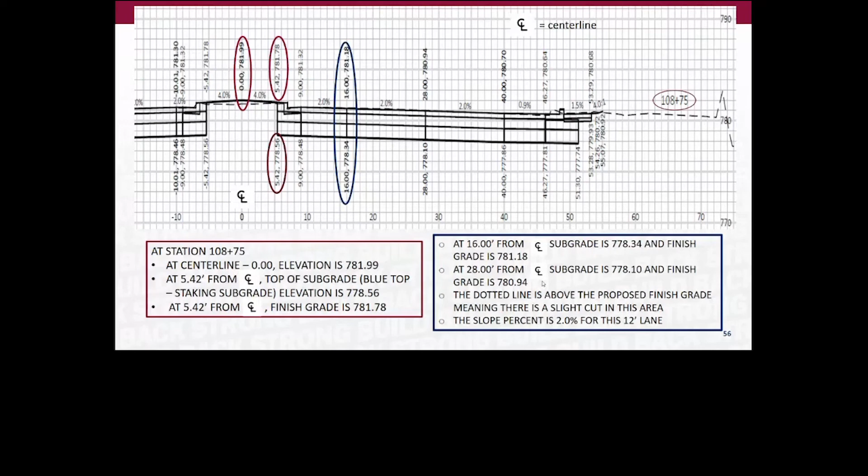So at 16 feet out, you have the same 2 different numbers. One is at your subgrade, one is at your finished grade. And then at 28 feet out, same thing.

You have a subgrade, top of subgrade, and then your final finished grade when all is said and done. What I want to draw your attention to is right under that 2%, you can kind of see there's a dashed line. You can certainly see it underneath this part, under where the first circle came up. Well, that's your existing line. That's your existing grade. So in this case, we had to add more.

But right here, in order to get where we need to be for our depths of base, asphalt, concrete, whatever this is calling for, and to get our 2% in this 12-foot lane, we actually have to cut a little bit of the existing ground out. So that's how you read these. Sometimes, like I said, you can't really see it. You got to blow it up. And over here is your stationing. This is significant to this point on the project at this station.

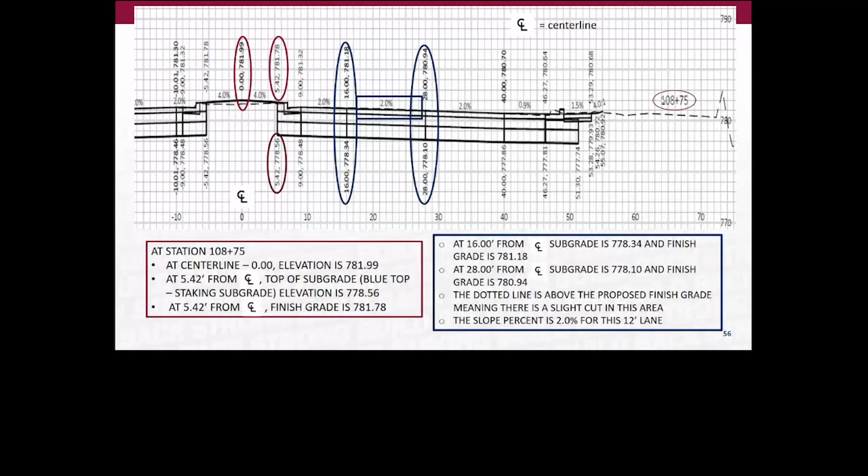So the other contract documents real quickly that we want to talk about are the special provisions. Plain and simple, always read the special provisions before you create and submit a quote. There's too much information and details in there that can completely trip you up if you do not read this. And you also have to read it throughout the life of the project. If you have addendums, always check the HCCS site for any addendums on any project that you plan on bidding.

If there's an addendum and it has an SOI after it, it means that it's a statement of, oh, now I'm going to screw it up. It means the quantities have changed. Somewhere in there, there's a change to the original quantities that were listed in the original bid. You have your standard specifications, and y'all know where to find those. You can still order a hard copy, or you can get them through the WisDOT site.

And then we've been hinting around the whole time about the hierarchy of contract documents. Addendum and modifications are the hierarchy. This comes right out of section 105 in the standard specifications, followed by the special provisions, plans, standard special provisions, and the standard specifications. So your standard specifications are lower than anything else, your addendum being the highest. And a lot of contracts don't have addendum before bidding, but they will have them during the project in the term of modifications. So you always want to keep an eye out for that.